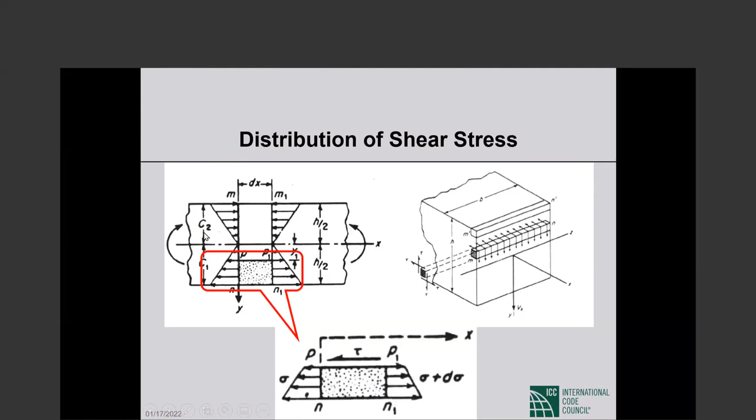So the sum of the normal forces over Pn, this entire area, would be the integration from y1 to c1, the distance to the end. C1 was shown in the previous picture, from neutral axis to the bottom. C2 is from neutral axis to the top. So the sum of the normal forces over Pn, this hatched portion, is the integration from y1 to c1 of My over I dA.

Now we go to the other section, M1N1, where the bending moment has increased a little bit to M plus dM. Sigma dA is now M plus dM over I times y dA, so the sum of normal forces over P1N1 is the integration from y1 to c1 of this larger moment, M plus dM over I times y dA.

For equilibrium of this elemental block, the horizontal force tau works over the distance dx, and the width of the beam is b. So the total shear, tau b dx, is equal to the horizontal force on this face, which is this integral, minus the total normal force on the left face, which is this integral. When you take this away from that, you end up with dM over I times y integrated from y1 to c1.

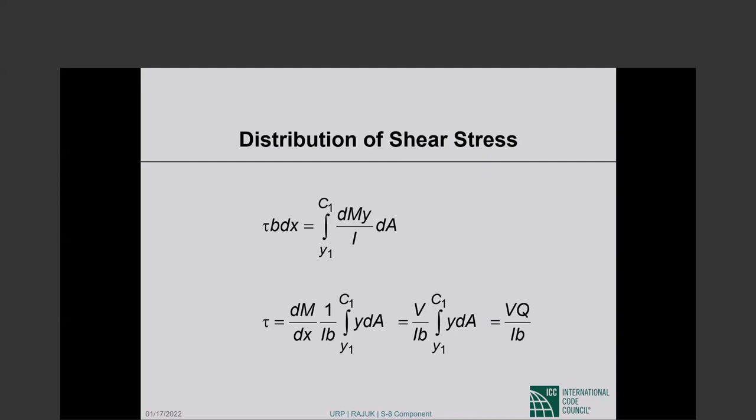This integral is denoted by Q, and that gives us the very familiar expression, tau is equal to VQ over IB. Tau is the shear stress at a distance from the neutral axis; in this case, the distance is y1. So we wrote the same expression again. Q is the integral of y dA, where y is the distance of this elemental area from the neutral axis, and dA is the elemental area.

We integrate that over the hatched portion of the section from y1 to c1, which is the distance to the bottom.

dA is the width B times dy, the incremental depth of the elemental area. We can take the B out of the integral since that doesn't vary with depth, giving the integral of y dy from y1 to h/2. The integral of y is y squared over 2, and taking it from the limits of y1 to h/2 gives us this. So the Q we are looking for in our particular case is B over 2 times h squared over 4 minus y1 squared.

So tau is given by this expression. At the top and bottom of the beam, where y1 is plus h over 2 or minus h over 2, tau disappears as it should. So at the top and the bottom of the beam, there is no horizontal shear stress, as we all know.

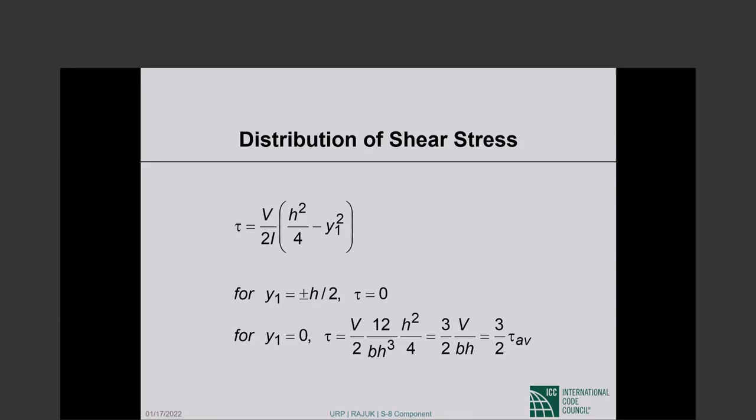So quite a few important conclusions: the horizontal shear at any level is VQ over IB, the expression we all know, which we derived from first principles. At the top and bottom of the beam, shear stress is 0. At the neutral axis, the shear stress is maximum, equal to 1.5 times the average shear stress. So this is the overall picture.

The total depth of the beam is H. At the section we are looking at, the shear is V. The average shear stress over the section is V over BH. This shear is horizontal as well as vertical, as you know. At the neutral axis, the maximum shear is 1.5 times V over BH, the average shear. These are very basic things we need to keep in mind in shear design.

This has to become second nature: the calculation of the horizontal shear stress using VQ over IB, fully understanding what the quantity Q is, and the variation of the shear stress along the depth of the beam.

Then the principal stresses, which are easily established using Mohr's circle. This is the second topic from strength of materials that I will take you through, and then we will go into ACI 318 and BNBC shear design, which is our topic today, which is where we are headed. But these preliminaries, I think, are extremely important.

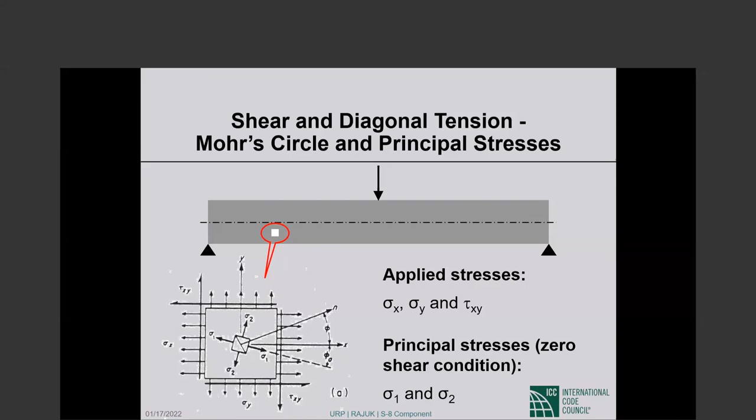The idea is, when we talk about principal stresses, there are no shear stresses associated with them. They are the largest or smallest stresses that an element is going to experience. Now, in order to figure out sigma 1 and sigma 2, the principal stresses, we typically use the construction of Mohr's Circle, and these are the steps, let us implement them rather than read them.

So this is our element. We have on the right and left face, the vertical faces, sigma x and tau xy. We plot along the x-axis sigma x, that brings us to point F, and we plot tau xy going up. Let us say this tau on the left and right face is a positive shear, causing clockwise moment.

Then we plot sigma sub y, that brings us to point F1, and on the top face and the bottom face there are shear stresses that cause counterclockwise moment. So this is a negative tau xy, and we plot that, which brings us to point D1. So the stresses on the right and left face took us to point D, and the stresses on the upper and lower face take us to D1.

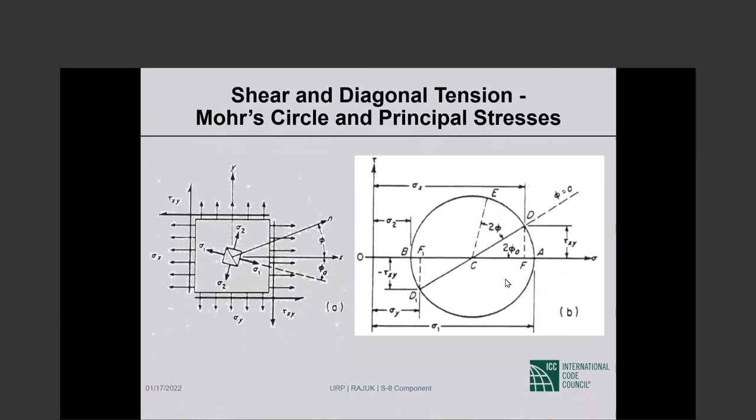So anyway, I don't know that we will do a lot with the angle, but the sigma average is sigma sub x plus sigma sub y by 2. The radius is equal to that.

So now the principal stress sigma 1, which is from here to there, is OC plus CA. OC is sigma average, and CA is the radius of the circle, which is equal to that. So the first principal stress, sigma 1, is given by this expression.

The second principal stress, sigma 2, which is the distance O to B, is sigma average, the distance O to C, minus the distance CB, which is the radius, and that is then given by this expression. So if we know sigma x, sigma y, tau xy, then we are in a position to figure out the principal stresses sigma 1 and sigma 2, which are not associated with any shear.

Those are normal stresses, either tension or compression. So now we are back to a beam under uniform load, simply supported.

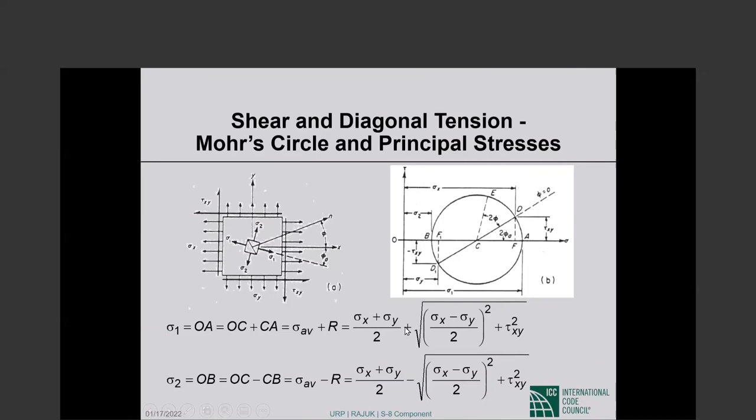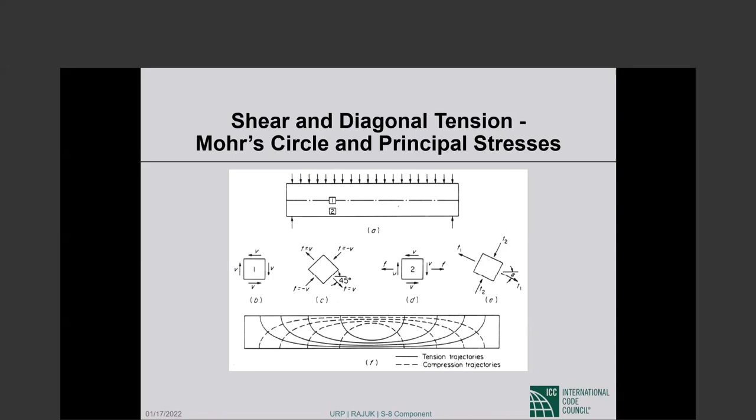So when we talk about shear design, we are talking about resistance to diagonal tension. In summary, resisting shear in concrete is resisting diagonal tension in concrete. Diagonal tension is maximum at the neutral axis of a given section and zero at the top and bottom edges, as we saw. The shear stress is maximum at the neutral axis, so is diagonal tension. Shear stresses disappear at the top and bottom, so does diagonal tension.

Now a few things that are good to appreciate. Typically the ratio V is the shear, M is the corresponding moment at the section, D is the effective depth. VD over M is a unitless, non-dimensional quantity, and it tells you about how a beam is going to behave.

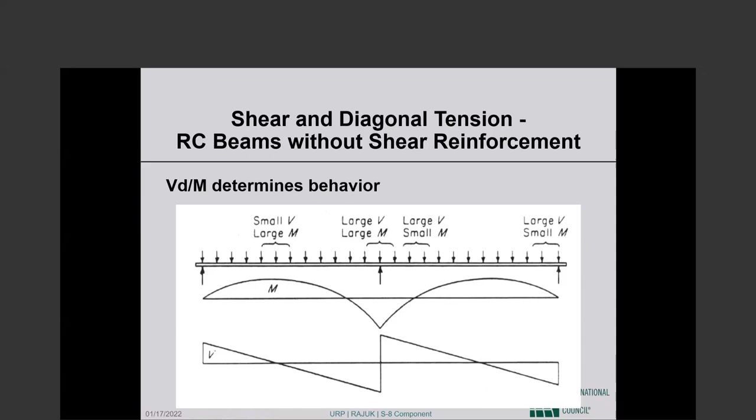This is a beam continuous over the middle support. At this location, we have large moment, no shear or very small shear. At this location, at the support, both the moment and the shear are high. Near this inflection point, the moment has become very small to zero, but the shear is still large. And at this location, the shear is large, the moment is small.

We talked about the principal tensile stresses. Those principal tensile stresses are the largest at the neutral axis, so diagonal tension stress near the neutral axis is the largest diagonal tension. When that equals and then exceeds the tension strength of the concrete, there will be cracking at the location of the neutral axis, and this kind of cracking is called web shear cracking.

This is now coming home - this is now hardcore shear design of concrete beams. There is web shear cracking and flexure shear cracking that we deal with all the time. So what is web shear cracking? When the principal tensile stresses, which are the largest at the neutral axis, equal or exceed the tensile strength of the concrete.

It is much more variable - everything depends on the proportions of the beam, if it is a thin-webbed beam and all kinds of things. But flexure shear cracking happens at a lower stress than web shear cracking, and this is why flexure shear cracking is much more common than web shear cracking.

Now, the flexural reinforcement - remember we are talking about beams without shear reinforcement, but there is flexural reinforcement, and that plays an important role. Large tension reinforcement percentage rho results in smaller and narrower flexural tension cracks prior to formation of diagonal tension cracking. That is common sense, right? This leaves a large area of uncracked concrete to resist shear.

So the cracking shear stress, which would be 0.16 square root of f sub c prime if we don't consider this effect, goes up by this expression. Everything I'm showing here, that number is experimentally derived based on a lot of testing.

So the flexure shear cracking strength is the concrete contribution, 0.16 square root of f sub c prime, plus the contribution of the longitudinal steel that is there for bending. It is given by that expression, and the two together must be no higher than the web shear cracking strength of 0.29 square root of f sub c prime.

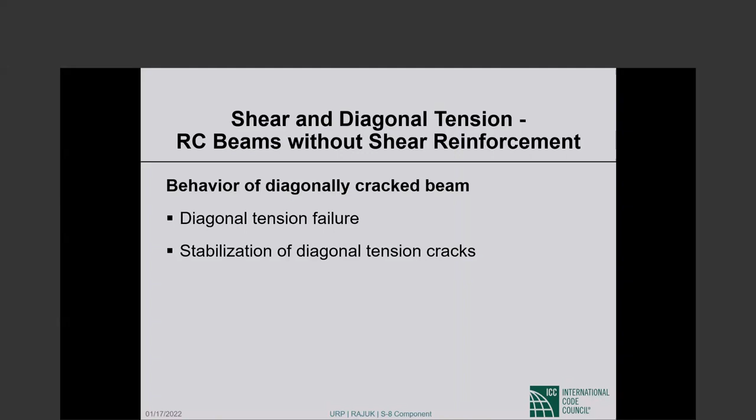It goes all the way through, causing failure of the beam - that would be diagonal tension failure. That is not uncommon by any means. Or the diagonal crack may stabilize and the beam could go on carrying higher loads. Both scenarios are possible.

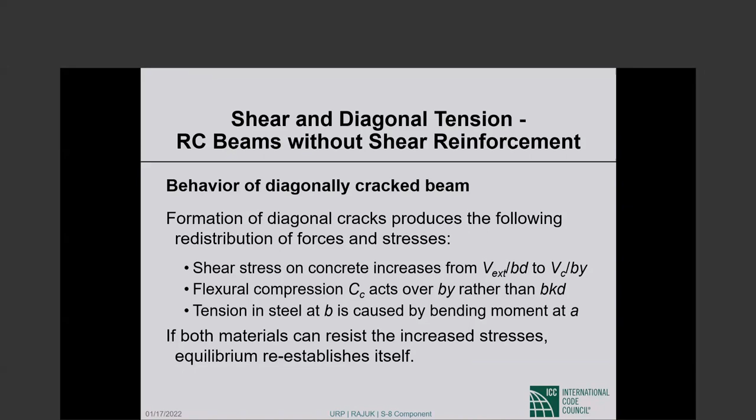Tension in steel at B is caused by bending moment at A. Shear stress on concrete increases from V external over BD to V sub C over BY. Flexural compression acts over By rather than B times Kd, and tension in steel at B is caused by bending moment at A. If both materials can resist the increased stresses, equilibrium re-establishes itself. So the opening of a diagonal crack does not have to be the end of the beam.

So the shear resistance mechanism consists of V sub C, shear resisted by the concrete as before. V sub S, shear resisted by the stirrups, that is new. V sub D, shear resisted by dowel action of flexural reinforcement. And V sub IY, shear resisted by aggregate interlocking along the inclined crack.

Now V external is V sub C, the shear resisted by the uncracked concrete, plus V sub S, shear resisted by the vertical shear reinforcement, plus shear resisted by dowel action, plus V sub IY, the vertical component of the aggregate interlock shear.

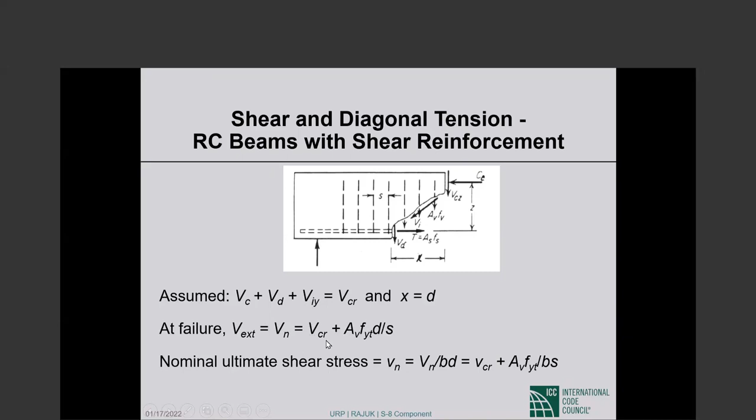So for nominal ultimate shear stress rather than strength, we divide by BD, giving lowercase v sub CR, which is capital V sub CR divided by BD, and A sub V F sub YT divided by BS. This is just division by BD. So this is the important part: the nominal shear strength is the cracking strength of the concrete in diagonal shear, plus the shear resisted by the vertical shear reinforcement.

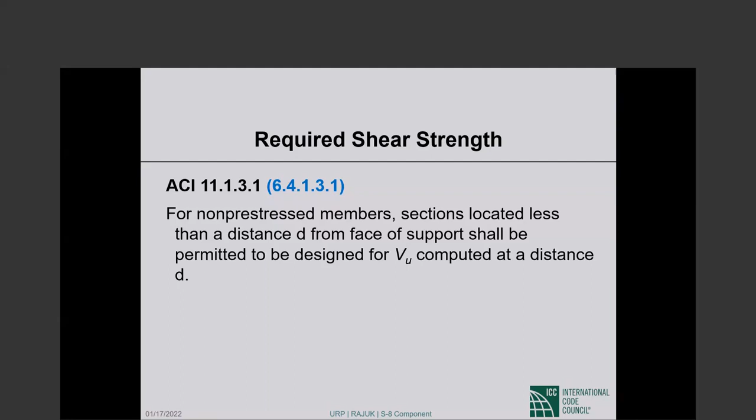So the critical section at a distance d from the support face is applicable if all of the following conditions are satisfied. First, the support reaction in the direction of applied shear induces compression into the end region of the member, rather than tension. That would typically be the case in a typical beam: the beam wants to go down, if you like, and the support keeps it from going down and produces compression.

Second, loads are applied at or near the top of the member. This is important. If you have a beam with ledges, like precast spandrel beams, and you apply the loading on the ledge rather than on the top of the beam, then you do not satisfy this condition. Third, no concentrated load occurs between the face of support and the location of the critical section. This is extremely important. You cannot take the critical section 1d away from the support face if within that distance d there is one or more concentrated loads sitting on the beam.

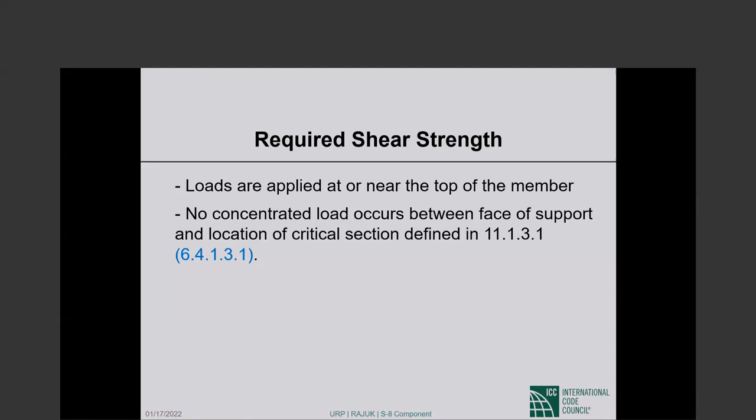Okay, these are some illustrations. The top picture is what I was describing: a precast beam with a ledge. The loading is applied on the ledge, not on the top of the beam, so the critical section goes back to the support face, not 1d away. Here, there is no compression at the support; this beam is hanging from something, so the support does not provide compression, and the critical section is at the support face.

This is a normal situation: a beam with loading at the top. The support provides compression, and the critical section is 1d away from the support face. Same thing here with a beam-column joint: there is compression at the support, the loading is at the top, and the critical section is 1d away from the support face. Here, a concentrated load sits close to the support, so the critical section is at the support face, not 1d away.

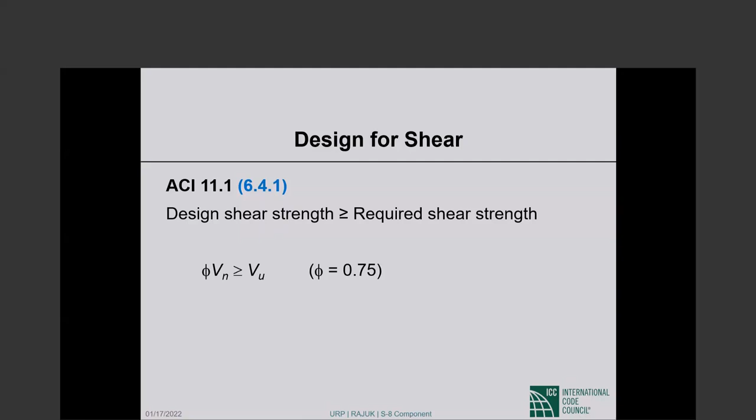The nominal shear requirement: required shear strength V sub U has to be smaller than or equal to the design shear strength phi times V sub N. Required shear strength has to do with structural analysis, applied load, and the structure. V sub n is something we will calculate from the given section. Phi is specified to be 0.75.

V sub n, nominal shear strength, where does it come from? Part of it is contributed by the concrete, V sub C, and part by the shear reinforcement, V sub S. This V sub C is what we were calling V sub CR previously when we were talking about mechanisms. This is not just the shear in the compression concrete, so that you understand - there is a little bit of a switch in notation. So V sub n is contributed partly by concrete, partly by the shear reinforcement.

And the concrete contribution may have those other multiple parts, may have dowel shear in it, may have aggregate interlock shear in it. That's totally fine. V sub C is shear strength provided by concrete, calculated in accordance with the relevant section. V sub S is shear strength provided by reinforcement, and we will look at that.

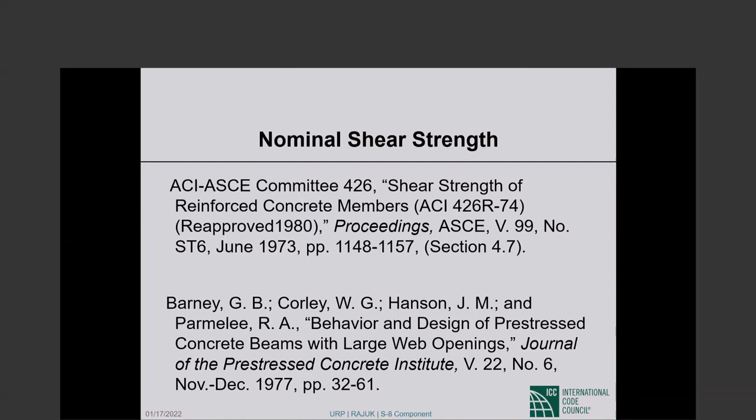In determining V sub N, the effect of any openings in members shall be considered. This is an important statement, but going into that will be time consuming. So I have confined myself to giving you two references, all of which are quite good in telling you how you may approach that problem of openings in your member when you are calculating shear strength. And I will leave it at that.

In determining V sub C, the concrete contribution to shear strength, whenever applicable, effects of axial tension due to creep and shrinkage in restrained members shall be considered. That will take away from shear strength. Any tension takes away. And effects of incline flexural compression...

The effects of incline flexural compression in variable depth members shall be permitted to be included. Any compression will improve V sub C, and we are saying that if there is actual compression, as there will be in inclined members, that shall be permitted to be included. You don't have to include it, but you are allowed to include it. In the case of tension, you have to consider it - it takes away from V sub C.

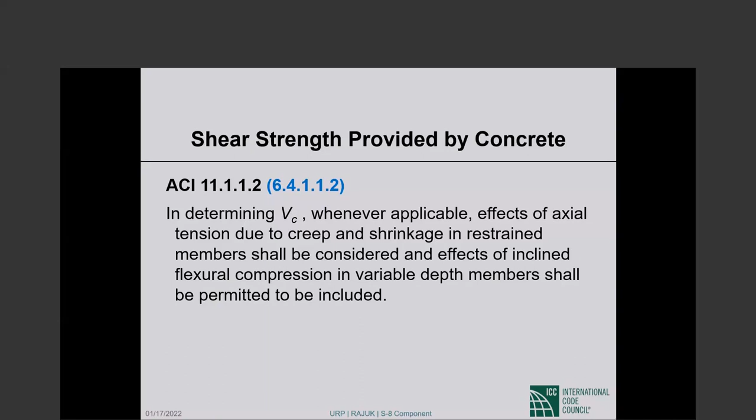Now, something basically a twist, if you like. The value of square root of f sub c prime - whenever we talk about V sub C, we typically express it in so many square root of f sub c prime, and that is sometimes true of V sub u also. So let us say shear strength is so many square root of f sub c prime.

Square root of f sub c prime shall not exceed 8.3 megapascals, except as allowed in section 11.121. In American units, square root of f sub c prime cannot be taken any more than 100 psi. The background to this is we did not have test results for beams having compressive strength in excess of 10,000 psi. For f sub c prime exceeding 10,000 psi, we did not have shear strength test results. So ACI 318, in several editions ago, said let us restrict concrete strength to 10,000 psi, which means square root of f sub c prime shall be restricted to 100 psi. That's what you are looking at here - 8.3 MPa, square root of F sub C prime.

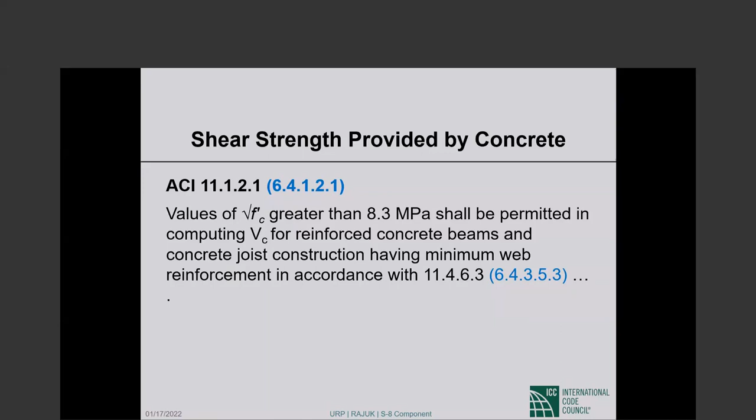Okay, before we go there, this is okay. So based on the test results, an increase in the minimum amount of transverse reinforcement is required for high strength concrete. In ACI 318-89 through 99, the increase in minimum amount of shear reinforcement was sudden. In 318-02, the increase became gradual. Okay, let me go there.

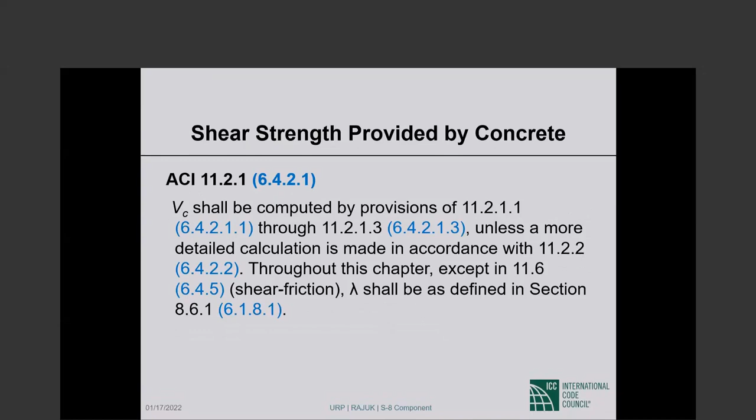I'll come back. I have a figure. Oh, what happened to that? Second. I know that I have the figure. Give me 1 second. Strange. Yeah, this is what I'm looking for.

So, anyway, where we started is this: 70 MPa is 10,000 psi. So this is the shear reinforcement. We provided minimum shear reinforcement anyway.

When the concrete compressive strength exceeded 10,000 psi, if it were 10,001 psi, and we wanted to benefit from the shear contribution of the extra psi of compressive strength, we had to provide 2 times the minimum shear reinforcement. We had to apply a multiplier of 2 to the minimum shear reinforcement. That multiplier of 2 went up to 3, corresponding to 15,000 psi compressive strength, and after 15,000 we did not increase the multiplier anymore. So all of a sudden at 10,000 psi, we had to provide twice the minimum shear reinforcement we would otherwise provide. That 2 times minimum went up to 3 times minimum for 15,000 psi, and then it remained level.

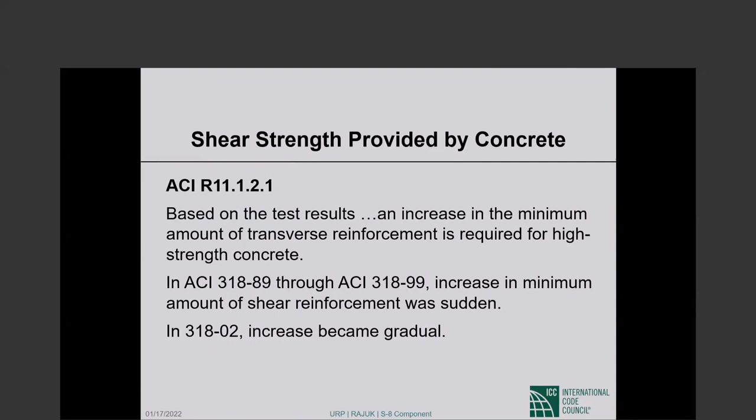Okay, so based on test results, an increase in the minimum amount of transverse reinforcement is required for high strength concrete. So 318-89 through 99, the increase in minimum amount of shear reinforcement was sudden. 318-02, the increase became gradual, and it will come back as you saw.

Now, V sub C shall be computed by the provisions of such and such a section, unless a more detailed calculation is made in accordance with another section. Throughout this chapter, except in 11.6, which is shear friction, which we will not discuss today, lambda shall be as defined in section 8.6.1. Lambda, the lightweight concrete factor, is in chapter 8, and you can look that up.

I didn't reproduce that. Okay, so this is how to calculate V sub C, the concrete contribution. There is the regular calculation, and then there is the detailed calculation. As you saw, you can do it 2 ways, and this is the usual way of calculating V sub C.

For members subject to shear and flexure only, as opposed to axial force, V sub C is 0.17 times the lightweight concrete factor times square root of F sub C prime times B sub W times D. We have seen this 0.17 square root of F sub C prime for quite a while now. Okay, so that was flexure and shear only, no axial force.

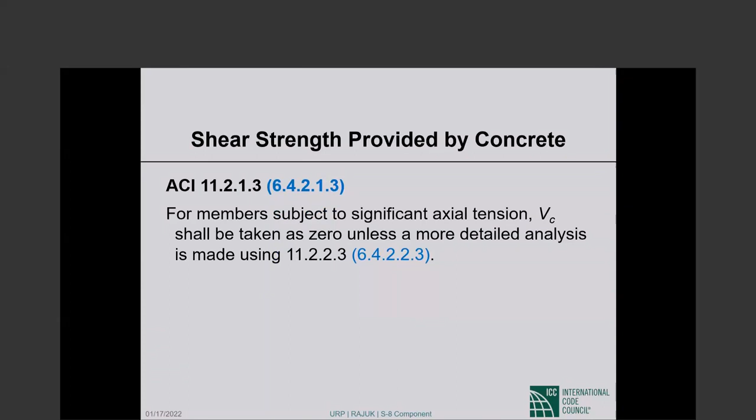Look at this. So in this simplified or regular calculation, for members subject to significant axial tension, V sub C shall be taken as 0 unless a more detailed analysis is made using such and such section.

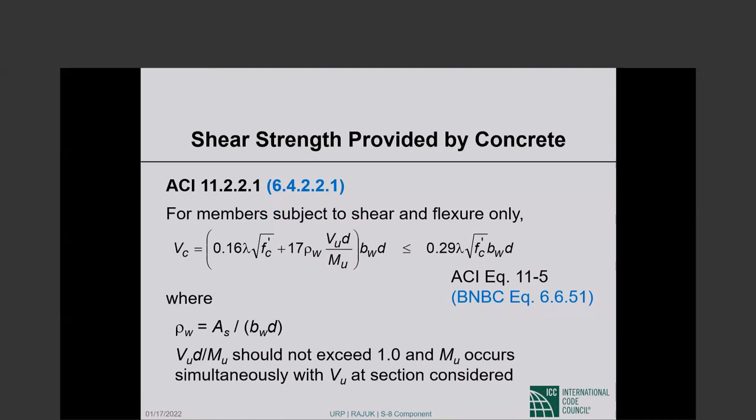V sub C, now comes the more complicated calculation. V sub C shall be permitted to be calculated by the more detailed calculation, sections 11.2.2.1 through 11.2.2.3, the more detailed calculation. This I'll skip, I'll let you read. I don't have a lot of... yeah, this can be used. Anyway, I don't want to spend time on the detailed expressions. I think they are understandable if you read them.

So that is regular calculation. There is detailed calculation of V sub C. That detailed part I skipped to save a little bit of time.

For circular members, effective shear area is important. I don't know how common it is to have circular beams, but anyway, for circular members, effective shear area is taken as the product of the diameter and the effective depth of the concrete section. Effective depth d can be taken as 80% of the diameter of the section.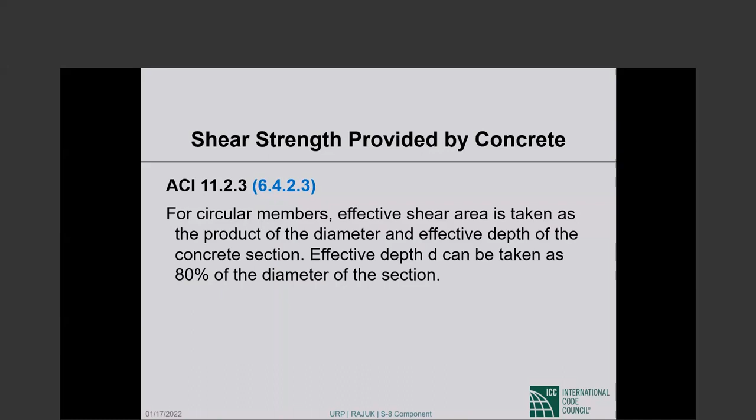This is kind of interesting - diameter times 80% of the diameter. That would be your effective section.

Types of shear reinforcement. Here again, there is a lot of stuff I will skip because most of it is old or antiquated - bent bars and so forth. I haven't seen those used; they are so labor intensive. Maybe in Bangladesh there is some limited usage, but I doubt it.

So the following are permitted as shear reinforcement: stirrups perpendicular to axis of member, by far the most common; and welded wire reinforcement, what we used to call welded wire fabric, with wires located perpendicular to axis of member.

I do not know if this usage is common in Bangladesh, but here it is not uncommon. The advantage is that instead of individual stirrups, some of the work is already done when you get fabric in on the job. So, stirrups perpendicular to axis of member, welded wire reinforcement with wires perpendicular to axis of member, spirals, circular ties or hoops - those are not uncommon at all.

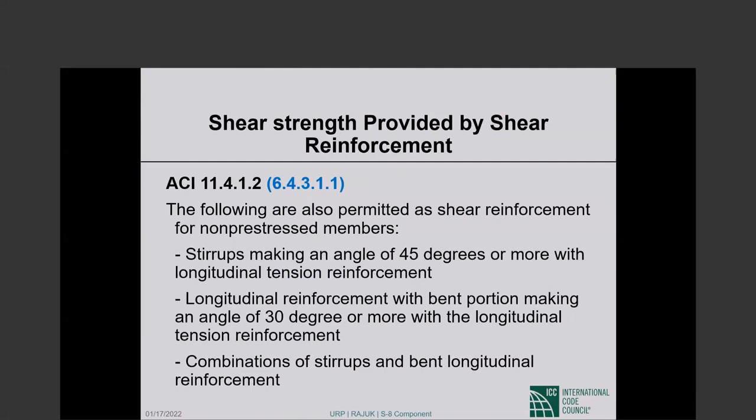The following are also permitted as shear reinforcement: stirrups making an angle of 45 degrees or more with longitudinal tension reinforcement; longitudinal reinforcement with bent portion making an angle of 30 degrees or more with the longitudinal tension reinforcement; and combinations of stirrups and bent longitudinal reinforcement. Some of this I don't want to spend time discussing.

This is extremely important: F sub YT, the yield strength of shear reinforcement, is limited to 420 MPa. Please keep that in mind - limited to. If you use higher strength reinforcement in shear calculations, you cannot use F sub YT in excess of 420 MPa. If it is welded deformed wire reinforcement, then yield strength is restricted to 550 MPa.

These are the various types of shear reinforcement: stirrups, welded wire fabric, inclined stirrups - more than 45-degree angle. So those are the inclined stirrups. Longitudinal bent bars - this is the tension bar bent up and then it becomes a compression bar. This used to be done a long time ago. Also combination of bent bars and stirrups, and then spirals.

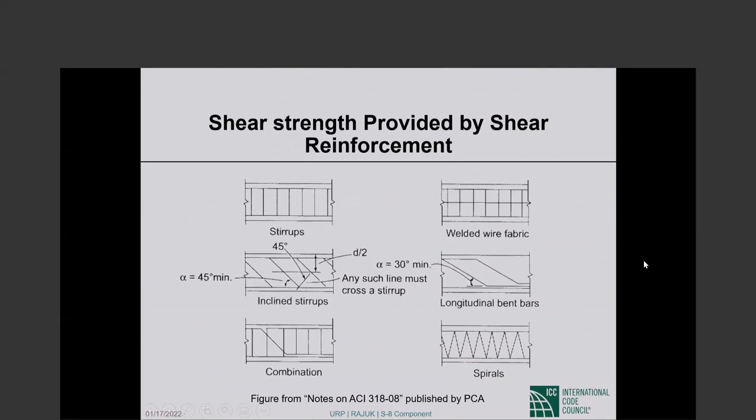So this is very common - sorry, this is not uncommon. That is not terribly uncommon, but these inclined things I think are not common.

Stirrups and other bars or wires used as shear reinforcement shall extend to a distance d from extreme compression fiber and shall be developed at both ends. This is not unimportant. We will talk about development of web reinforcement tomorrow. It is important that the stirrups be developed.

Minimum shear reinforcement: after diagonal shear cracks are formed, additional deformation results in the growth of shear cracks, and it is resisted by shear reinforcement. This is very important to get in your heart even - this is how it always is. If you keep on loading your beam, additional deformation results in growth of shear cracks, resisted by shear reinforcement. Prior to 318-02, minimum amount of transverse reinforcement was not a function of concrete compressive strength, as you saw.

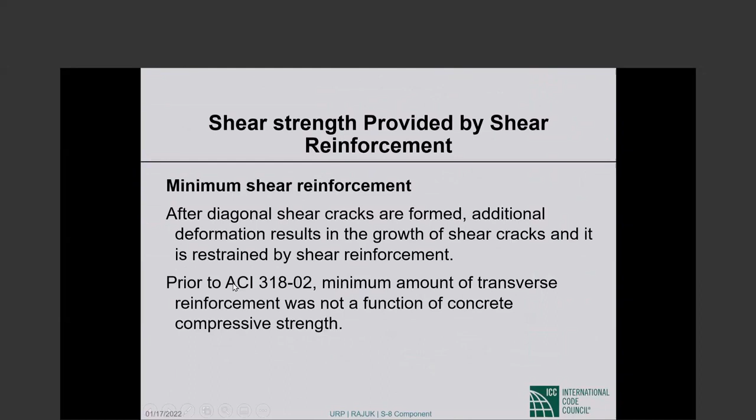Prior to ACI 318-02, as referenced in BNBC 2020, minimum shear reinforcement did not depend on compressive strength. This was the old expression. Experimental tests verified that the required amount of shear reinforcement should be increased with higher concrete strength to prevent sudden failure after inclined cracks were formed.

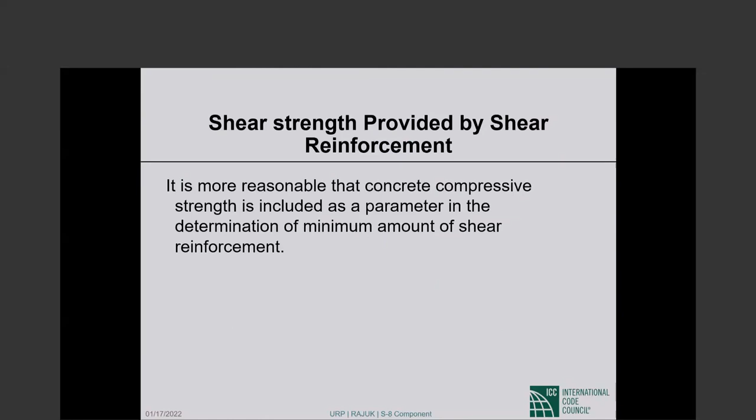This is extremely important, so I will read it again. Experimental results verified that the required amount of shear reinforcement should be increased with higher concrete strength to prevent sudden failure after inclined cracks are formed. So it is more reasonable that concrete compressive strength is included as a parameter in determination of minimum amount of shear reinforcement.

So this is now the expression: it has square root of f sub c prime in it, this is A sub V minimum. Something close to the previous expression is now the lower bound. Since 318-02, minimum amount of shear reinforcement is a function of concrete compressive strength. So A sub V minimum is given by this expression, except that it shall never be less than that, irrespective of concrete strength. This I already showed and described to you, so there's nothing more.

Minimum shear reinforcement shall be provided where, okay this is another pretty important topic. So theoretically, if V sub U, the required shear strength, is less than phi times V sub C, the shear that concrete alone can carry, you should not need any shear reinforcement, right? If concrete alone can carry all the shear, if V sub U is less than phi times V sub C, then why would you provide shear reinforcement?

Minimum shear reinforcement shall be provided where V sub U exceeds, not phi times V sub C as you would expect, but 0.5 phi times V sub C. So please note that we provide minimum shear reinforcement as soon as V sub U exceeds 0.5 phi times V sub C, half the shear at which we would normally expect to provide shear reinforcement.

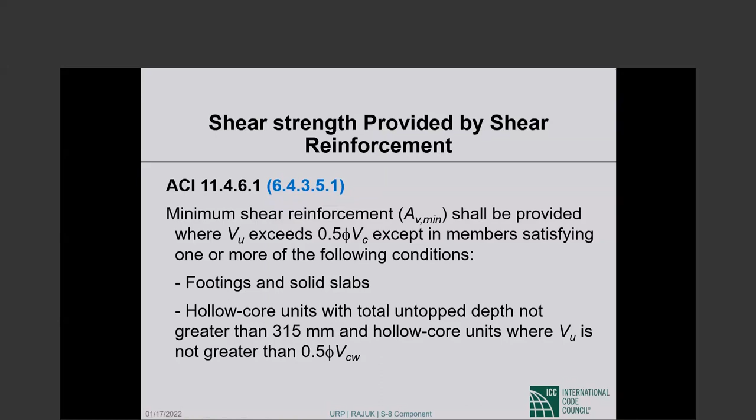No shear reinforcement at half of phi times V sub C: footings and solid slabs, hollow core units with total untopped depth not greater than 315 millimeters, and hollow core units with V sub U no greater than 0.5 phi V sub CW. That crept in, anyway this list I don't have to dwell on every item. Concrete joist construction as defined in 318: no shear reinforcement at phi times V sub C by 2.

Beam with total depth not greater than 250 millimeters. Beam integral with slabs with H not greater than 600. Anyway, I'll let you read this list. So there are certain things for which we do not need minimum shear reinforcement unless V sub U exceeds phi times V sub C.

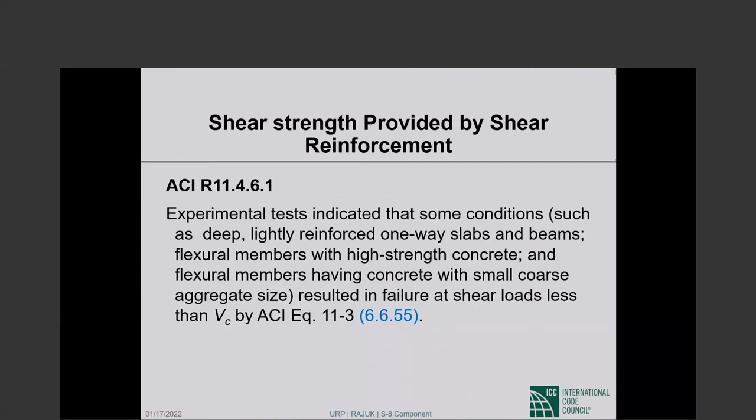Experimental tests indicated that some conditions such as deep, lightly reinforced one-way slabs and beams, flexural members with high-strength concrete, and flexural members having concrete with small coarse aggregate size resulted in failure at shear loads less than V sub C. This is why most of the time we provide shear reinforcement as soon as V sub U exceeds half of V sub C. Providing minimum amount of shear reinforcement is a prudent approach for flexural members subjected to repeated loading, even though shear reinforcement is not required based on calculation and/or experimental static tests.

Minimum shear reinforcement requirements shall be permitted to be waived. This has been in the code for a long time. I would say this is a problematic provision. Anyway, let us read it.

Minimum shear reinforcement requirements shall be permitted to be waived if shown by test that required M sub n and P sub n can be developed when shear reinforcement is omitted. If you can demonstrate you don't need shear reinforcement, you don't have to provide it. Then such tests shall simulate effects of differential settlement, creep, shrinkage, and temperature change based on a realistic assessment of such effects occurring in service.

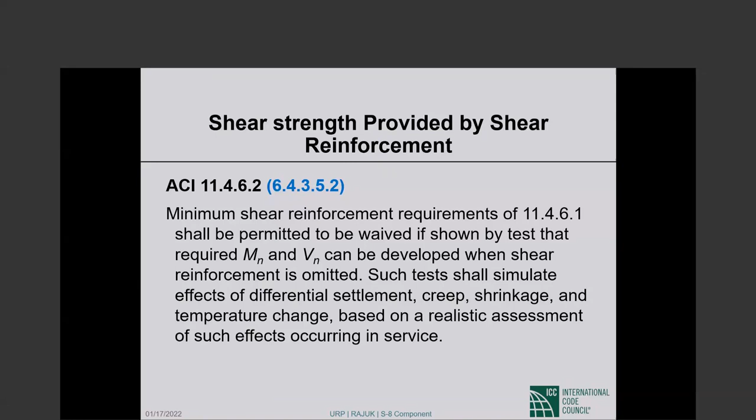It probably can be done, but it's not easy to do, and satisfying the building official that you have done that is pretty challenging. So yes, this is theoretically a way out, but practically I do not know how many have succeeded in doing that.

When shear reinforcement perpendicular to the axis of the member is used, this is the reinforcement part. We talked about V sub C quite a bit. V sub S is A sub V times F sub YT. That's the shear carried by one piece of shear reinforcement times the number of shear reinforcement crossed by a diagonal crack, which is the D over S part. So V sub S equals A sub V, F sub YT, D over S.

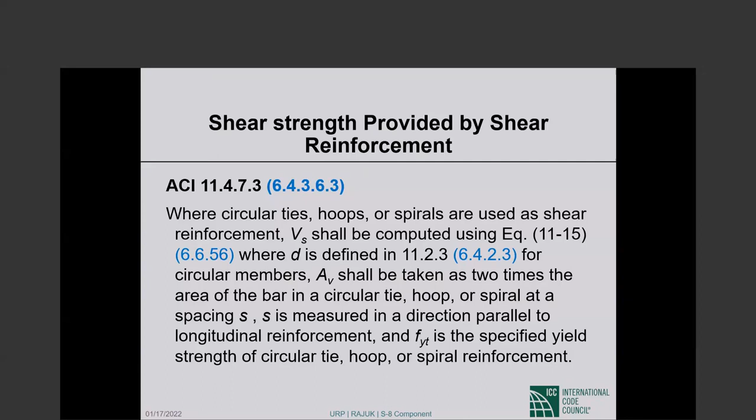Where circular ties, hoops, or spirals are used as shear reinforcement, V sub S shall be computed using the equation shown, where D is defined in the section for circular members, remember 80% of the diameter. A sub V is important here. A sub V shall be taken as 2 times the area of the bar in a circular tie, hoop, or spiral at a spacing S. S is measured as described, and S and F sub YT are clearly understood.

Then there are expressions for V sub S for inclined bars and things, which I will skip. I don't know that those are of high interest.

Even though this is about inclined bars, I think this is important: only the center three-quarters of the inclined portion of the longitudinal bent bar shall be considered effective for shear reinforcement. V sub S shall be computed as the sum of the values computed for the various types of shear reinforcement. This is important - if you have inclined bars and stirrups, the V sub S will be the combined contribution of the inclined bars and the stirrups.

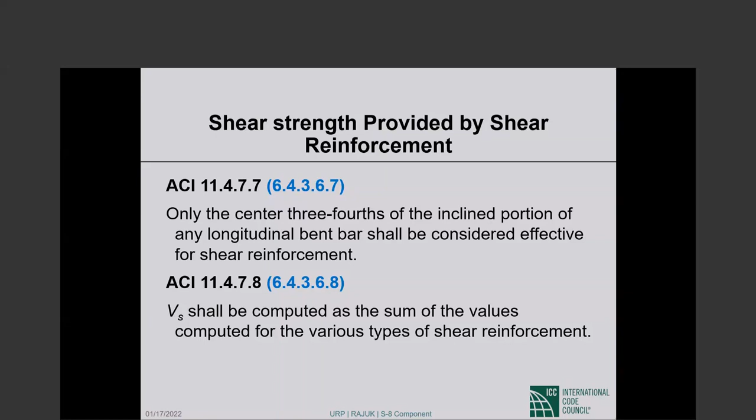V sub S, the contribution of the reinforcement, shall not exceed 8 square root of F sub C prime in your units, 0.66 square root of F sub C prime. So that means the sum of the concrete contribution and the steel contribution shall not exceed 10 square root of F sub C prime. Concrete is good for 2 square root of F sub C prime, steel cannot exceed 8 square root of F sub C prime. So the total nominal strength of a section cannot exceed 10 square root of F sub C prime, 0.83 in your units.

That is because at a higher shear stress, the shear is transmitted from the point of application down to the ground via compression struts that form in your member, and those compression struts will crush in compression, irrespective of how much reinforcement you may or may not provide. So that is why there is an absolute upper bound. V sub n shall not be any more than 10 square root of F sub C prime. The reinforcement contribution shall not exceed 8 square root of F sub C prime.

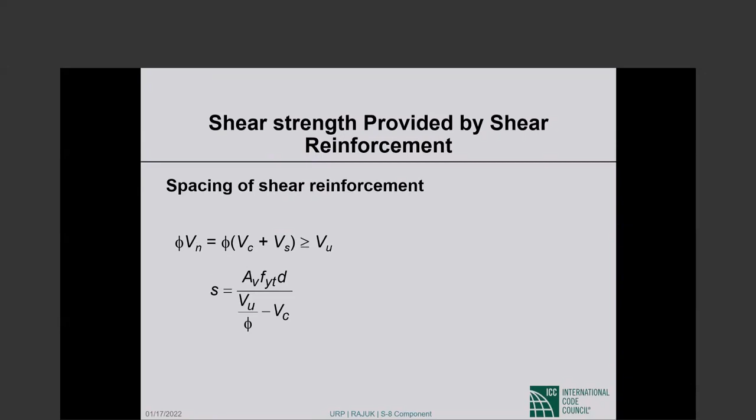These things I think are familiar to most. Spacing limits for shear reinforcement placed perpendicular to the axis: as long as V sub S is less than or equal to 4 square root of F sub C prime, the maximum spacing is D over 2 or 600 millimeters, which is 24 inches.

So as long as V sub S is less than or equal to 4 square root of F sub C prime, the maximum spacing is D over 2 or 24 inches. When V sub S is larger than 4 square root of F sub C prime, that goes down to D over 4, but never more than 12 inches. So those are the maximum spacing rules.

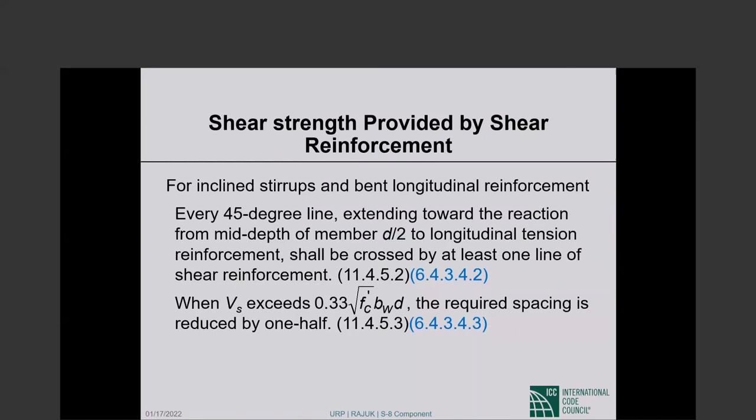This is the inclined bar stuff that I am going to skip. I will show you a numerical example which will make things fall in place.

So I started from strength of materials, as you saw, trying to make the point that we are designing for diagonal tension, and then looking at the concrete contribution to shear strength and the contribution of the shear reinforcement to shear strength. The concrete contribution has multiple parts: the shear in the compression concrete, the dowel shear, the aggregate interlock shear, and all of that we kind of lump together in typical applications.

Anyway, then for design purposes, minimum reinforcement, maximum spacing. So we have covered everything that will enable us to solve real life problems, and we will do one or two of them. Deep beams is a topic that used to be covered at length in ACI 318 up to the 99 edition.

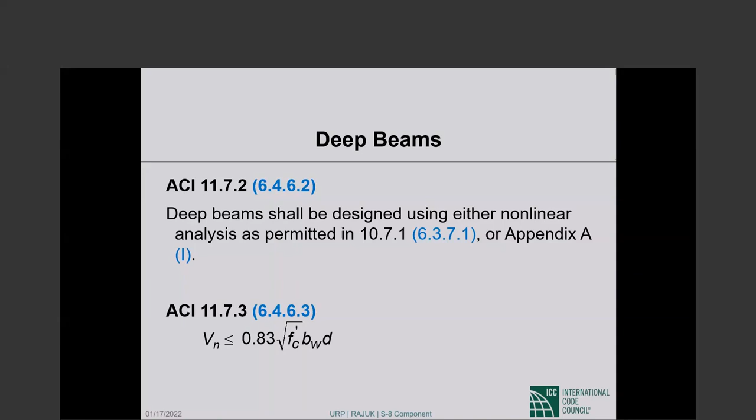In addition to that, all we are told is the nominal shear strength as per a regular beam shall not exceed 10 square root of F sub C prime. Very importantly, 318-08 tells you a reference may be made to 318-99 for detailed design procedures. So we took it out of the code, but it is still good to use.

318-08 tells you, and this is very important: in a deep beam, you have to have not only vertical shear reinforcement as in a conventional beam, but also horizontal shear reinforcement parallel to the flexural tension reinforcement. Minimum amount for this vertical steel is 0.0025 B sub W times S, so one quarter of a percent. Maximum spacing is D over 5 or 300 millimeters. So these are the minimums on the vertical shear reinforcement perpendicular to the flexural tension reinforcement.

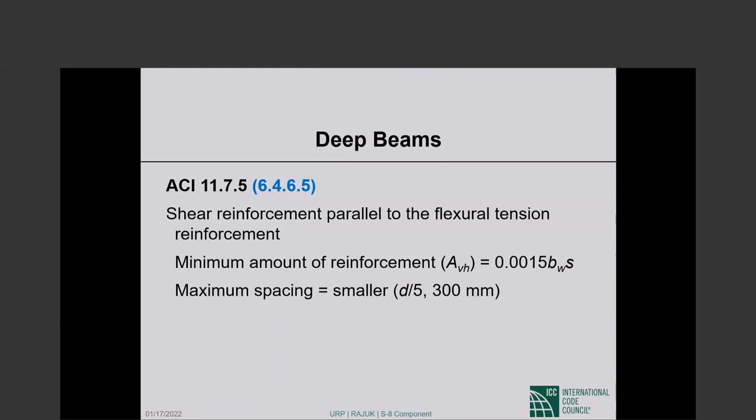The horizontal shear reinforcement, parallel to the flexural tension reinforcement, minimum is 0.15% and the maximum spacing is D over 5 or 300 millimeters. These I have taken from 318-08, not 318-99. So these are your numbers. And then I will show you an example, and hopefully things will fall in place.

I truly admire you. I was thinking 5 days a week, Saturday, Sunday, Monday, Tuesday, Wednesday of training for 3 hours, 4 out of the 5 days after work - this is an awful lot. And we had no choice; we had to compress the schedule to have the exam before Eid. At the same time, I totally, completely understand it is tough on you. So the best we can do, I think, is to make the lectures clear, and hopefully these examples help in that regard. Okay, yeah, and anyhow, stick with us. I think you will benefit. There is no question in my mind. So it's all worth it.

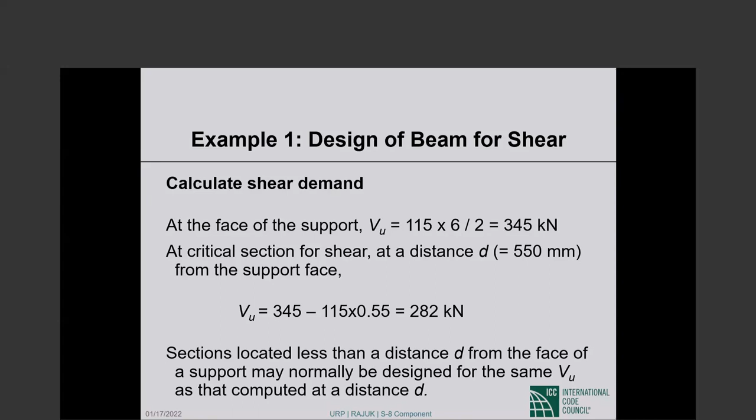Sections located less than a distance d from the face of support may normally be designed. We have gone through all of that. So we have a design shear of 282 kilonewtons.

How much can concrete carry? 0.17 square root of F sub C prime, B sub W, D. So 0.17 square root of 40, B sub W is 400, D is 550, that is 236 kilonewton. 282 is what we want to carry, 236 is the nominal. For phi equals 0.75, the 236 gets down to 177 kilonewton.

So we have 282 kilonewtons of shear to carry. Concrete can carry 177. The rest has to be done by reinforcement.

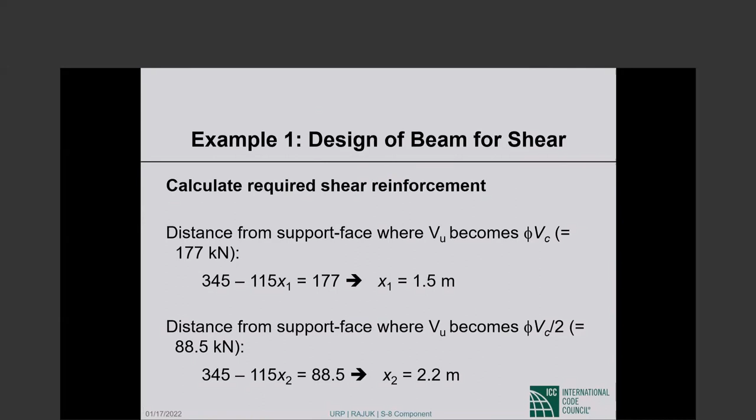Now here we are figuring something. You don't have to do it this way, but this is a fairly good way to do it. Distance from the support face to where V sub U becomes equal to phi times V sub C, 177 kilonewton. So beyond that, at least theoretically, we do not need any shear reinforcement.

That distance comes out to 1.5 meters. And then we find the distance from the support face where V sub U becomes 1/2 of phi times V sub C, which is 88.5 kilonewtons. That distance comes out to 2.2 meters.

V sub U is 282 kilonewtons at D from the support face. The shear gets down to phi times V sub C at 1.5 meters from the support face. Beyond this point, theoretically, we do not need shear reinforcement, but practically we do, because we cannot drop shear reinforcement unless shear drops below phi times V sub C by 2. That happens at 2.2 meters from the support face.

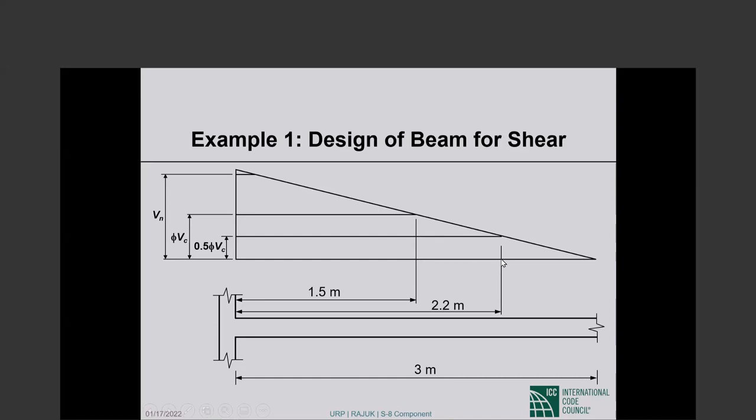Okay, so now we have our entire picture. Shear reinforcement needs to be designed for the length of the beam from each support face up to 1.5 meters from the supports. Minimum shear reinforcement needs to be provided between 1.5 meters and 2.2 meters from each support face. Beyond that, we don't even need the minimum.

V sub u minus phi times V sub C in our case is 345 minus 177, which is 168 kilonewtons. And that is less than 0.66 phi square root of f sub c prime.

So if we go for 12 two-legged stirrups, two legs have a total cross-sectional area of 226 square millimeters. The spacing comes out to 233 millimeters from this expression.

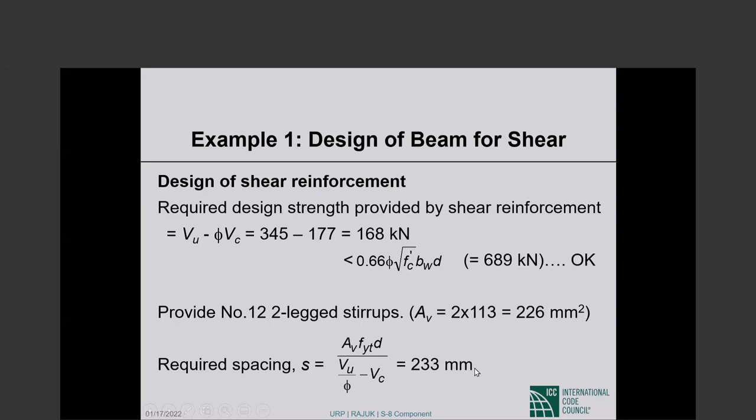233 is the required spacing. What is the maximum permissible spacing? Our shear is lower than 0.33 square root of f sub c prime, so our maximum spacing is 1/2 of d, or 600 millimeters. 1/2 of d is 275 millimeters. Remember, d is 550, and that is larger than the number we calculated, 233 millimeters.

So this number is smaller than the maximum spacing, so we can go with that number. We will provide 12 two-legged stirrups at 230 millimeter spacing.

And then calculate minimum shear reinforcement. Remember, the concrete dependent minimum is 86 square millimeters. The absolute minimum is 77 square millimeters. We are providing 226, so obviously we are way above the minimum in this particular case.

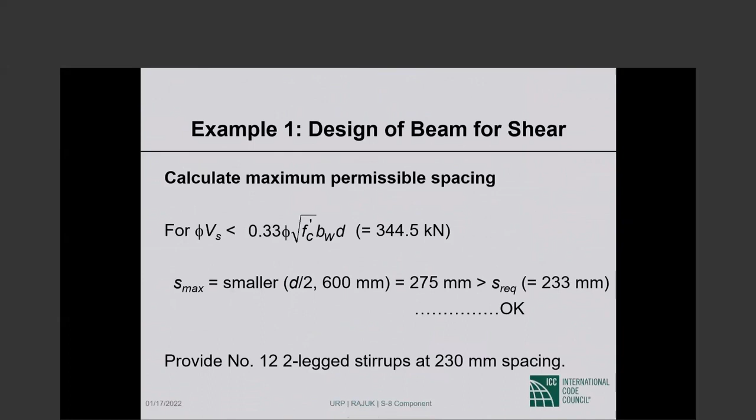So up to 1.5 meters from the support face, we have provided this 230 millimeter spacing.

Now, between 1.5 meters and 2.2 meters from the face of the support, minimum shear reinforcement needs to be provided. So what is the spacing of minimum shear reinforcement? We know how much the minimum shear reinforcement is - this is the concrete dependent minimum, this is the absolute minimum. So the spacing of the minimum shear reinforcement is 605 millimeters, and the spacing of the absolute minimum shear reinforcement is 678 millimeters. We cannot provide those.

The maximum spacing is 275 millimeters - remember, 1/2 of d is the governing value. So even beyond 1.5 meters, we will provide two-leg stirrups at 275 millimeter spacing, since that is the largest allowed. Place the first stirrup at 120 millimeters from each support.

Place the first stirrup at 120 millimeters from each support.

Place 6 stirrups at 230 millimeter spacing, starting from 350 millimeters from each support and up to 1500 millimeters from each support. So the first one is 120, then at every 230 up to 1.5 meters.

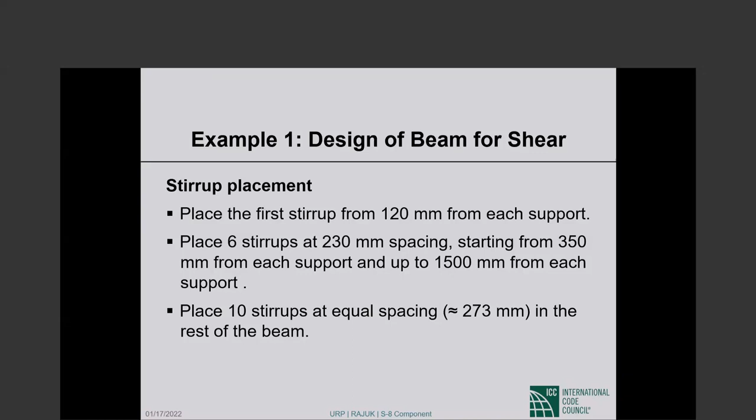If you just read the example once or twice, you will see that it's pretty simple stuff. So the first one at 120, then a few at 230, and then the remainder of the beam span is covered by the same reinforcement at a spacing of 273 millimeters. This is the complete shear design of the beam.

Okay, let's do a deep beam for shear. You will not find this in too many places, so I think you will probably like it and it may be useful to you.

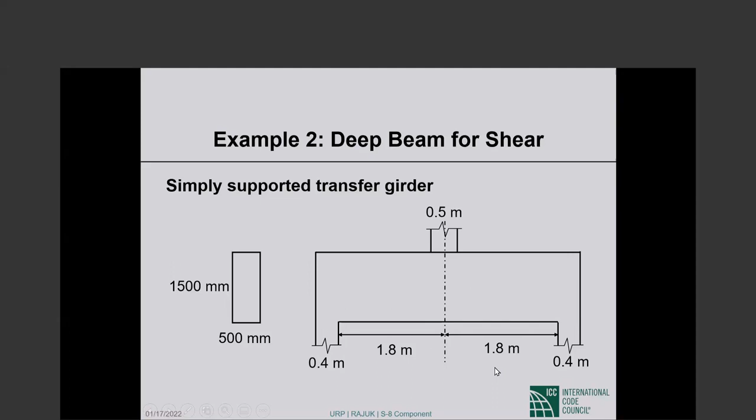So this is 1.8 meters, this is 1.8 meters. 1500 by 500 is the section. F sub C prime, F sub Y, dead load from the column is 800 kilonewtons, and live load from the column is 1100 kilonewtons. So on the transfer girder, the column transfers 800 kilonewtons of dead load and 1100 kilonewtons of live load.

The dead load of the transfer girder itself has a weight, with a section of 1500 by 500. So the weight of the transfer girder is lumped with the column load at midspan. We will just assume that the dead load of the transfer girder also acts at midspan as opposed to being uniformly distributed.

So the dead load of the girder, remember, is a 500 by 1500 section, 3.6 meters is the span. 2400 kilograms per meter cubed is the mass of the concrete, which you multiply by G to get it into kilonewtons. That gives the total weight of the transfer girder in kilonewtons, plus 800 coming from the column, for a total dead load of 864 kilonewtons.

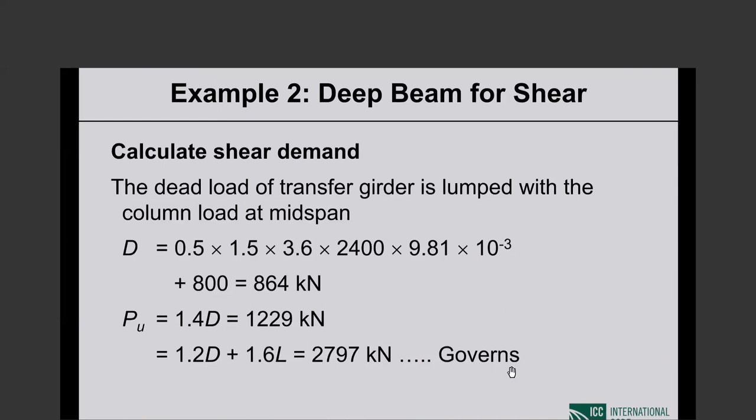Something happened. Something changed, Bodhi. Can you try pressing escape from your keyboard? Yeah, okay. It is still large size, right? Yeah, okay.

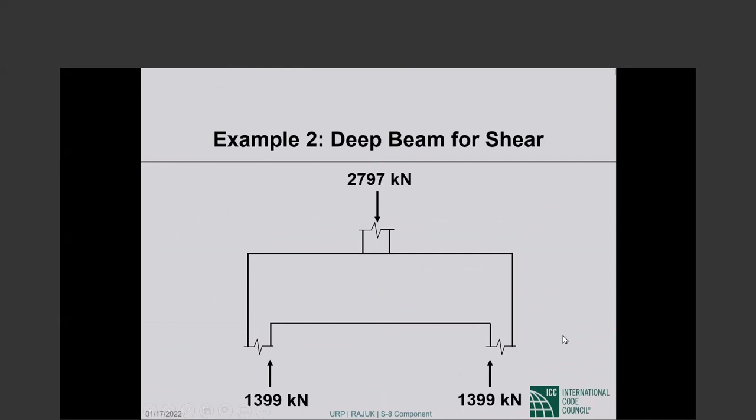Consider that big. So the governing load is 2797 kilonewtons. We are showing the 2797 at midspan, and that will give us support reactions of 1399.

So clear span 3.6 meters, overall height of beam is 1.5 meters. Clear span to total depth ratio is 2.4, which is obviously less than 4.0. The beam is loaded on one face, supported on the opposite face, so this is definitely a deep beam by the definition of ACI 318-08.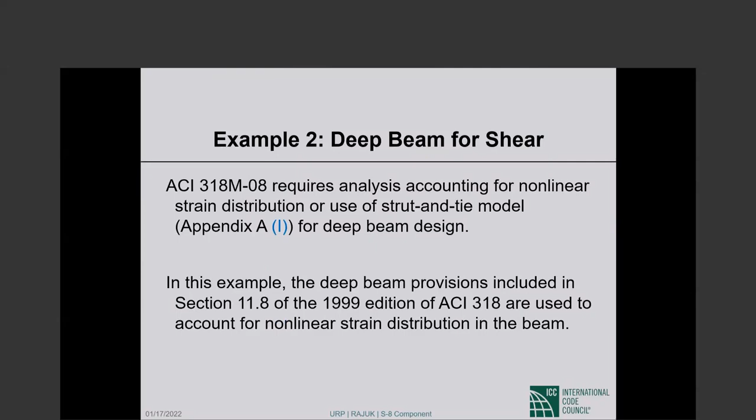ACI 318-08 requires analysis accounting for nonlinear strain distribution or use of a strut-and-tie model for deep beam design. In this example, the deep beam provisions included in section 11.8 of ACI 318-99 are used to account for nonlinear strain distribution in the beam. This is what I basically wanted to show you, the way we typically have done it.

So, assuming effective depth D is 90% of the total depth, D then comes to 1350 millimeters. That is an assumption, but not a bad assumption.

Distance from critical section for shear from support face, this is per ACI 318-99, is 50% of the distance from the support face to the load, and that is 900 millimeters. That being less than D, 1350 millimeters, that is where the critical section is.

Because the shear distribution is uniform here, it doesn't matter, since it's one concentrated load in the middle. So from the support to the load, it's the same shear. The shear demand does not change from the support face to the critical section, so V sub U at the critical section is also 1399 kilonewtons.

V sub C is given by the same expression as before, 2 square root of F sub C prime, which comes to 726 kilonewtons. Reduced by phi, that gives us 545. Obviously, 545 is less than the 1399 that we need to resist.

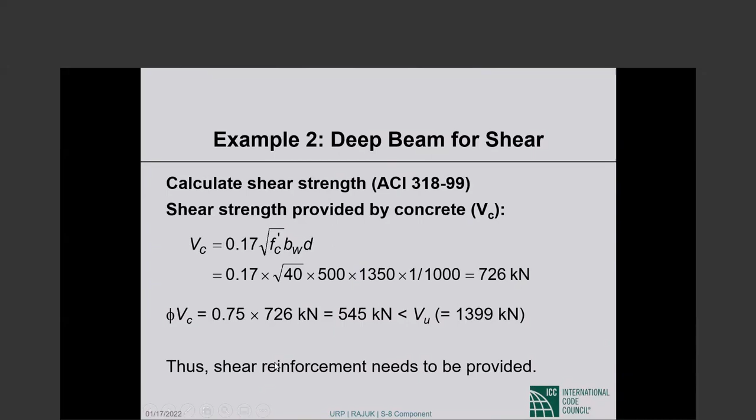Thus, shear reinforcement needs to be provided. This is the ACI 318-99 expression for V sub S, the contribution of shear reinforcement.

Remember we have vertical shear reinforcement and horizontal shear reinforcement in a deep beam. The vertical is A sub V, the horizontal is A sub VH. S is the spacing of the vertical reinforcement, S sub 2 is the spacing of the horizontal reinforcement.

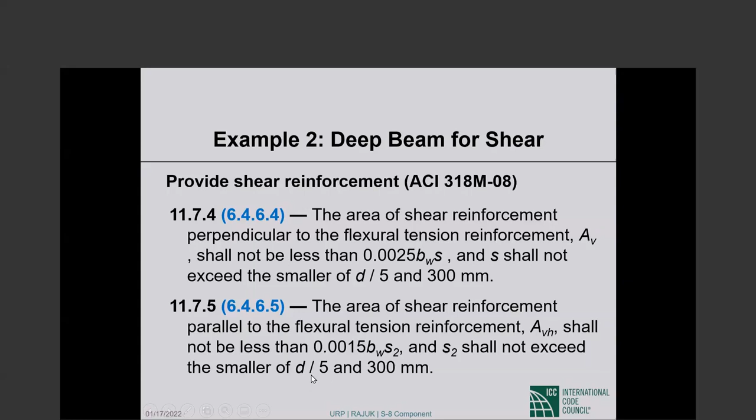The area of shear reinforcement perpendicular to flexural tension, A sub V, shall not be less than what's specified. The vertical shear reinforcement minimum is 0.25%, maximum spacing is 1/5 of D or 300 millimeters, whichever is less. The horizontal shear reinforcement minimum is 0.15%, spacing is D over 5 or 300 millimeters, whichever is less.

So minimum horizontal reinforcement ratio is 0.0015. Try two number 16 millimeter diameter bars, that will give us A sub VH of 402 millimeters. So required spacing would be 536 millimeters.

If we want 0.15% reinforcement using two number 16 bars, one on each face, that's what it means. Then the spacing of the horizontal shear reinforcement is going to be 536 millimeters. That is too much. The maximum allowable spacing is 1/5 of D, which is 270 or 300 millimeters. So it is actually 270 that governs.

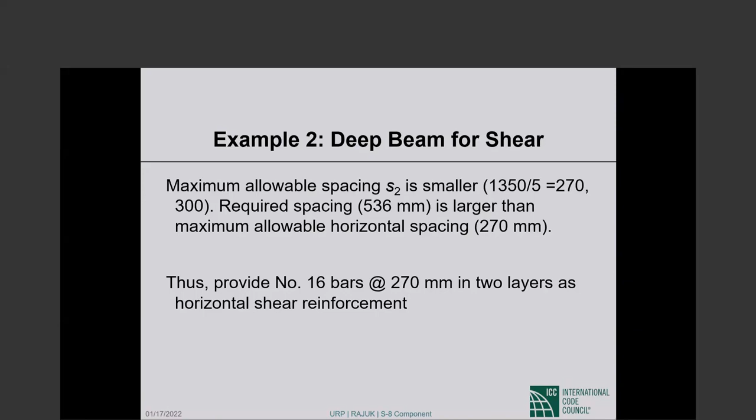So as far as horizontal reinforcement goes, we will provide number 16 bars, two number 16 at 270 millimeters. That is the horizontal shear reinforcement.

V sub S will be V sub U by phi minus V sub C, and that is given by the expression for V sub S you have seen. Using two-legged number 16 stirrups, A sub V would be 402 square millimeters. So in this entire expression...

Everything is known other than the S, that's the only unknown. Once we have decided that we are going for A sub V of 402 millimeters, in this entire expression only the unknown is the spacing of the vertical reinforcement S.

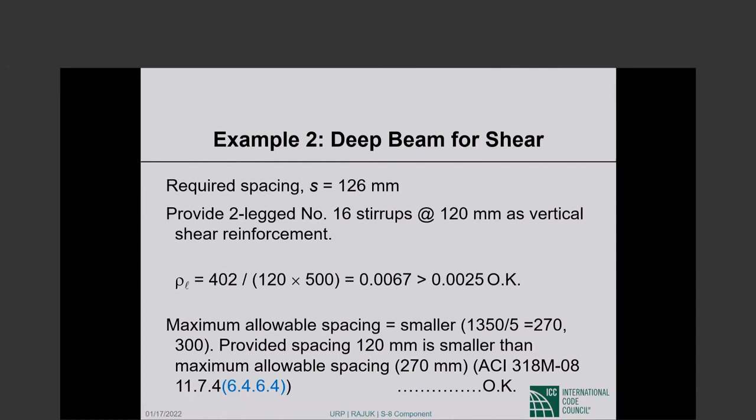When you solve that equation, S comes out to 126 millimeters. So we are saying provide two-legged number 16 stirrups at 120 millimeters as vertical shear reinforcement. That will give us a percentage of 0.0067, which is larger than the 0.0025 minimum that is needed, so that's okay. Maximum allowable spacing is 270, so 120 is totally fine.

So we have decided on the vertical and the horizontal shear reinforcement. Now we will make a final check. V sub S from this expression comes to 1167 kilonewtons for the exact vertical and horizontal reinforcement we have provided.

So V sub N comes out to 726 concrete contribution, 1167 reinforcement contribution, total of 1893, multiplied by phi it comes to 1420 kilonewtons, which is larger than the 1399 that we need. So the shear does not exceed 10 square root of F sub C prime, so we are okay on all counts.

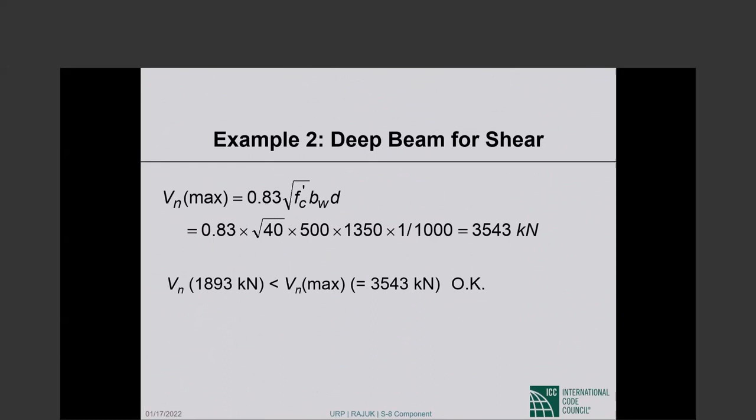So this is a complete design of a deep beam. As I said, you will not find it all that commonly anymore. This was last time in ACI 318-99, so I thought I would show it to you.

Then shear design of a one-way slab. I have 5 minutes of regulation time, it should be okay, I may go over by a couple.

So we have seen this in the flexural design calculation. There are several supports, not just one. This is the one-way slab spanning from left to right, and we take 1 meter width of the slab as a beam to design the slab.

The clear span is 7 meters. Concrete strength, steel strength, superimposed dead load is 2 kilonewton per square meter, live load 2.5 kilonewton per square meter. Slab thickness is 305, effective depth is 305 minus 20, clear cover 16/2, half the diameter of the reinforcement we're using in the slab. That comes to 277 millimeters.

Self weight of the slab: 305 millimeters, 2400 kilograms per cubic meter, 9.81 is the G, that gives us 7.2 kilonewton per square meter. Total dead load then is 7.2 plus the superimposed 2 kilonewton per square meter, that's 9.2.

Now we want to find the shear at the support by using empirical expressions that are in ACI 318, section 8.3.3. In order to be able to use those, there are some preconditions to be met, and here we are saying that all the preconditions are met. You can read those.

So based on an end span and a strip width of 1 meter, shear in end members at face of first interior support is 1.15 W sub U L sub n over 2. That's the shear in end members at face of first interior support.

So that's 60.5 kilonewtons. Shear at faces of all other supports is just W times L sub n over 2.

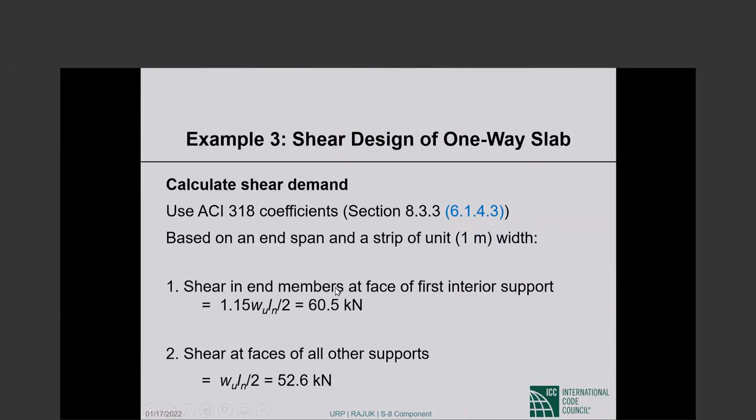Going back, if this is the first support and there are many supports afterwards, the highest shear will be at the exterior face of the first interior support, and that would be 1.15 W L n over 2. At all other supports, it will simply be W L sub n over 2. So the highest is 60.5, and at the other supports 52.6. So at the face of the support, 60.5 is the highest value.

Critical section for shear is at a distance D from the face of the support. D, we calculated, is 277. So the 60.5 kilonewtons of shear goes down to 56.3 at the critical section.

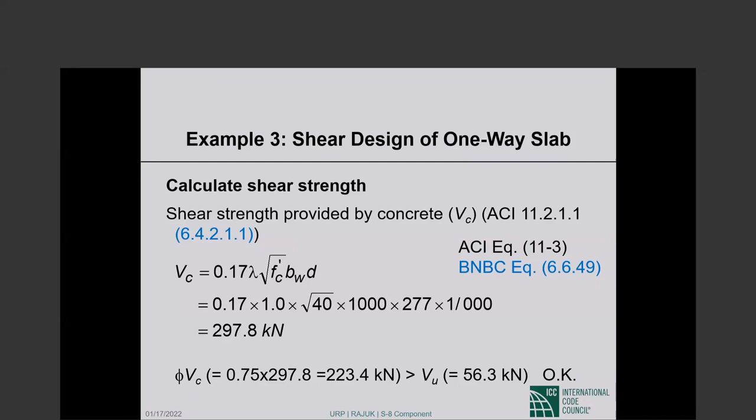56.3 kilonewtons of shear at the critical section. Out of that, V sub C is 297.8. Concrete alone can carry 297.8 times 0.75, which is 223.4 — obviously way larger than 56.3. So here we do not need any shear reinforcement. This is very typical of slabs; it's seldom, if ever, that we need shear reinforcement for one-way shear.

Minimum shear reinforcement is required when V sub U exceeds 0.5 phi V sub C. However, this requirement is not applicable, remember, for solid slabs. So our design is done — we do not need any shear reinforcement.

Okay, so I'm one minute late. That's not bad. So I'm open for questions for the next half hour, and we will do probably the same way.

So you are going to read to me? Yes, Dr. Ghosh. So there are a lot of questions, but many of them I answered during the webinar. Okay, and Dr. Rakib is also there. Okay, good, I made him a co-host. So if he can pretend to... Okay, he has some points. Okay, so I will start.

Okay, this is just a comment.

Is horizontal shear reinforcement mandatory for all deep beams, or is it just needed when required? Horizontal shear reinforcement is mandatory for all deep beams, yes.